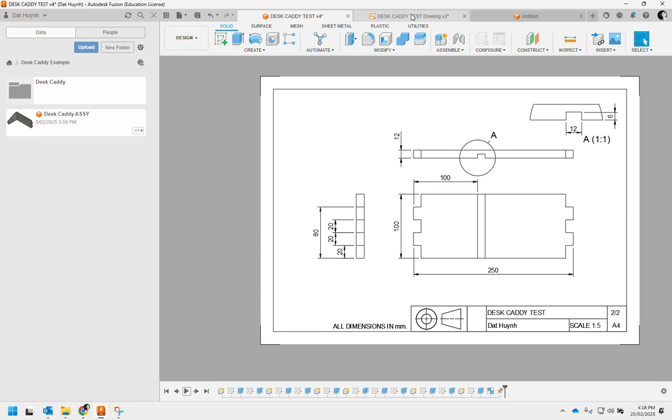Okay, so you see that's the whole process of making the basic carcass and the base of the Desk Caddy. You can add on more stuff later on if you like, but we're going to keep it simple for the sake of the class assessment task. You also learn how to make a drawing out of this. So you can see here that it creates the drawing from that assembly, and if you update the parts, the drawing also updates.

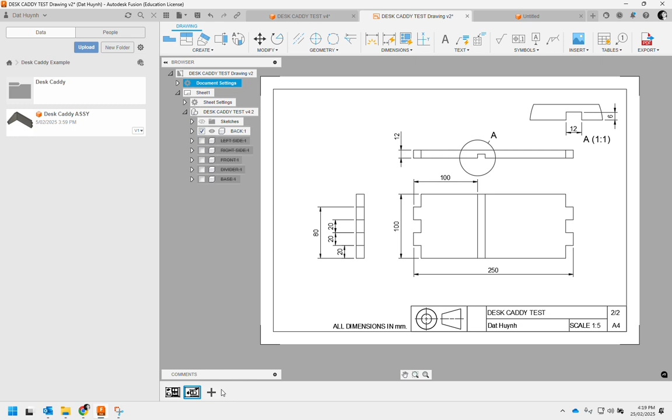And you can add on extra sheets, so you can do detail item drawings of each component, which you will take into the workshop, and that's how we're going to make your job when you have your full set designed and printed. We can then go ahead and cut your timber to make your Desk Caddy. Okay, so this is what we're going to be doing. I'm going to start modeling now.

The first thing you should do when you open up a new file is to go to Assemble, and the first thing you should ever do is just start a new component. Before you do anything else, start a new component. Okay, then what you're going to do first is name that component. In this case, I'm going to start with back piece, so I'm just going to go back part, and don't touch anything else. Leave everything as is, and just name it back part. Press OK, and we're going to start modeling up the back part.

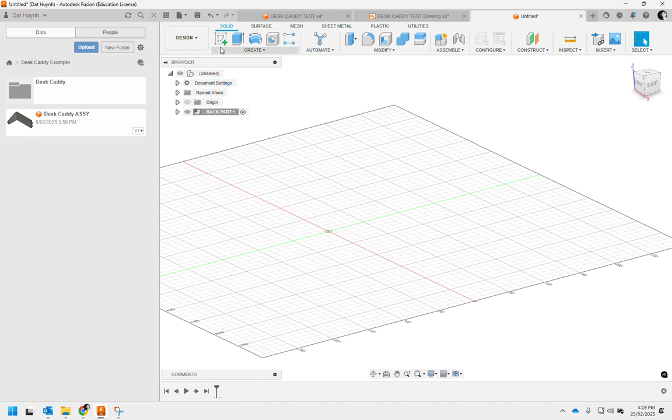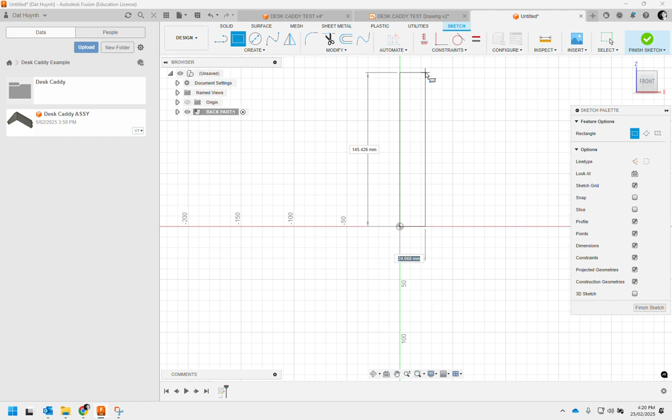And the way we start modeling is we start with a sketch, and we're going to choose the plane we are after. In this case, I'm going to choose the front plane here. And our first sketch must use the origin so that we're anchored into this 3D space, this universe that we just created. I'm going to draw a rectangle, and I'm going to model this as a cross section of the thickness and the height, or thickness and the width, and I'm going to extrude the length.

So I'm just going to click there, roughly what I need, and then I'm going to go back and I'm going to dimension it. So you can see here the shortcut is D for those of you who are working keenly. Press D, gets you to that tool, dimension, and I'm going to dimension this line here to be 12 mil. That's our thickness. Hit enter, and the height, click, and type in 100. For me, it's 100, depending on your job, right? So for this example, I'm making it 100 tall and 12 thick.

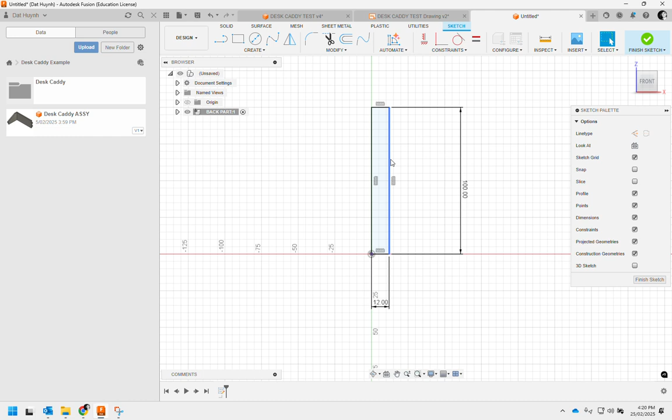Once I'm done, you notice all the lines are black. That's what we're after. Okay, make sure all lines are black before we finish the sketch, so we can't accidentally shift and move anything. So to get out of dimension mode, you can hit escape, and you can see here they're going to highlight the line, but I can't click and drag it because it's fully constrained, right?

But if I delete this 100 though, you'll see that this line's turned blue, but all the other lines are black. That means I can't wiggle this left and right because it's constrained as 12 millimeters, defined as 12 millimeters, but I can move it up and down. So that means my height is not constrained, right? It's got no dimension or constraint to hold it down. So I'm going to go back and do that dimension to be 100.

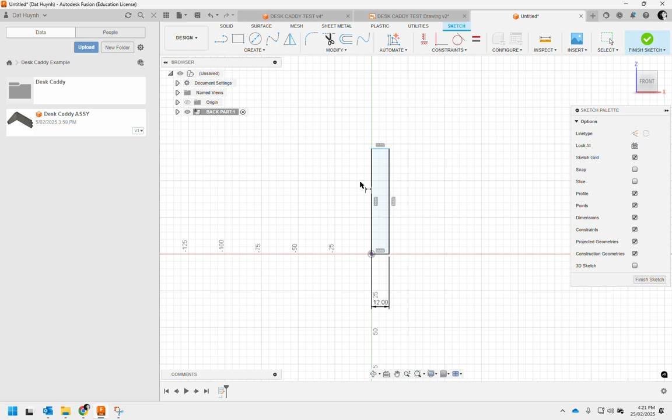And so we've defined this rectangle exactly to be 100 by 12, and it uses the origin here, so it anchors it to a 3D space. Finish sketch, and then we're going to extrude this shape. It helps to get to a 3D view, so just on my cube, I'll just click on the corner, get to a 3D view.

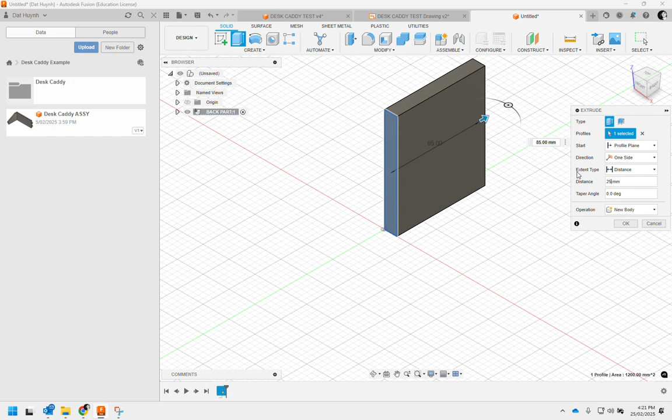And just to preview what it's going to be like, I'm going to drag that out, and it gives me a preview of the object. I'm going to make this distance to be the length. I'm using 250. You might be using a different number. And when I'm happy with that, I hit OK. Ignore everything else for now. It's all set correctly. Hit OK, and you've made yourself a rectangular prism that represents our block of wood.

Now, the way we model should reflect the way we process the timber in the workshop. So you get your piece of timber, you cut it down to size, and then we're going to mark out the joinery. So I want you to adopt the same type of methodology in your CAD modeling. It helps you understand your parts better, and also helps you work out what dimensions are important to you and when they become available. So you can only really mark out the joints after you've got your block of wood.

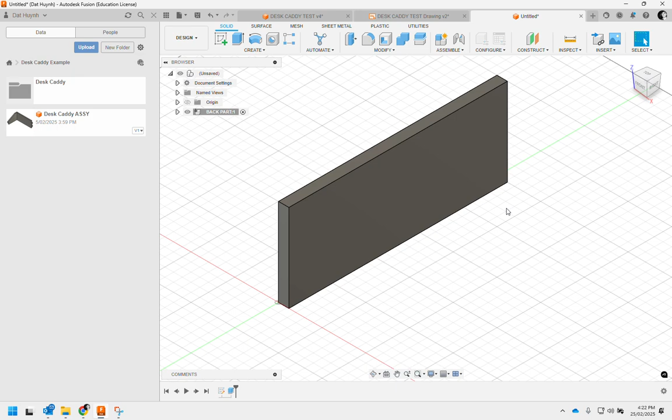So now we've got a block of wood. I'm going to create a sketch on this surface. So I can right click, create sketch, right? Or I can go to here and hit sketch, same thing. So if I go here and I go create sketch, I can then start marking out my joinery. So as you saw, I've got a box pin at the back. I'm creating a box pin that is, let's use this bottom corner here.

I'm going to draw a few rectangles, right? I'm going to draw rectangles, but I'm going to draw it badly. Let's draw 3 rectangles like that. Okay, right click, OK. So I don't want to be in the drawing tool anymore. And you see here that I can wiggle this line, I can wiggle this line. I can't wiggle this line because it's created an automatic constraint that this line, it knows I want it to be collinear with this edge of this rectangle. So it's made it collinear.

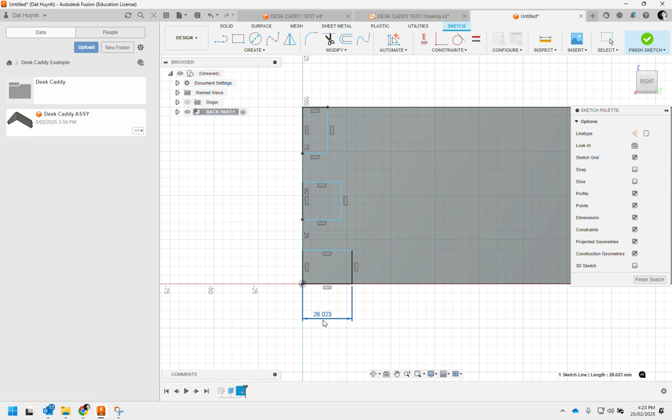But let's firstly define one rectangle. Okay, so we do that with a dimension. So I hit D for dimension. I want this one to be 12 mil because that's the thickness of the side piece that's going to join in. And the height of it, I can do it point to point or a line. In this case, I'll do point to point just for a difference. And I'm going to make this 20.

Okay. Now, I'm going to right click and I'm going to press escape to get out of dimension mode just to show you a neat way of dimensioning and using constraints so that you don't have to keep making each one of these 12 mil long. Okay. So there's a few ways you can do it. You can do it via constraints. There are all these different constraints you can use. They create relationships between lines and features so that you don't have to keep on using dimensioning.

Okay, so for example, I could want this line to be collinear with this line, right? So if I use collinear in this case, collinear is this one here. So from now until forever, if I click on 1, click on 2, they are now collinear. That's the relationship, unless I choose to delete that relationship, okay? Alternatively, another way you could do it is you can make this blue line equal length to this blue line. So let's try that. If I make equal and I go, I want this line to be equal to this line, guess what? It also works because logically, if this is in line, then that distance is the same.

So I've made two different constraints here. Ideally, I wouldn't do two different constraints. I would either make these blue lines here all equal or make these three lines collinear. Both are the same. You end up with the same result. And you can see here that if I try to wiggle this left and right, I can't because it's collinear. But I can move this up and down.

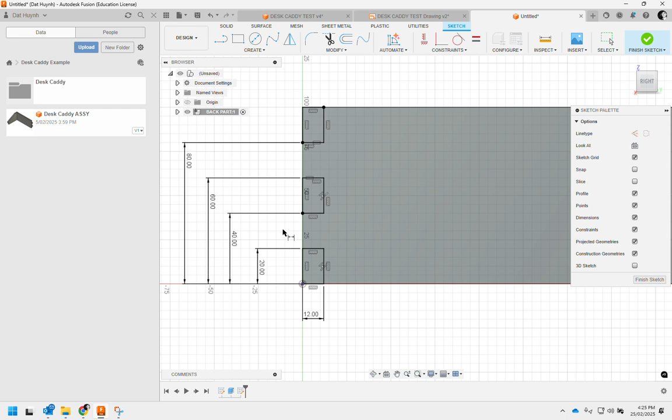Okay, so all my rectangles are now constrained. And I'm using this type of dimensioning because I'm going to use a marking gauge against this edge. And that way I can set the marking gauge to these numbers without having to do quick maths by adding up numbers here. Okay, either way is, I guess, correct, but this one is going to be more practical for you in the workshop. Once I'm happy with all these rectangles, nothing can be moved. I hit finish sketch.

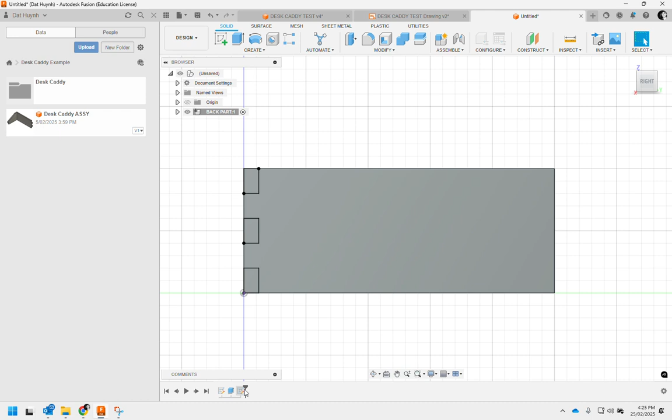Actually, I'm going to save you a bit more time. I'm going to go back to that sketch. So if you find that you hit finish sketch and you want to go back and edit it, at any point in time, you can just right click on that step here and edit the sketch. So don't go making a new sketch. You already created the sketch. If you forgot to add something in, just go back and edit and add it in.

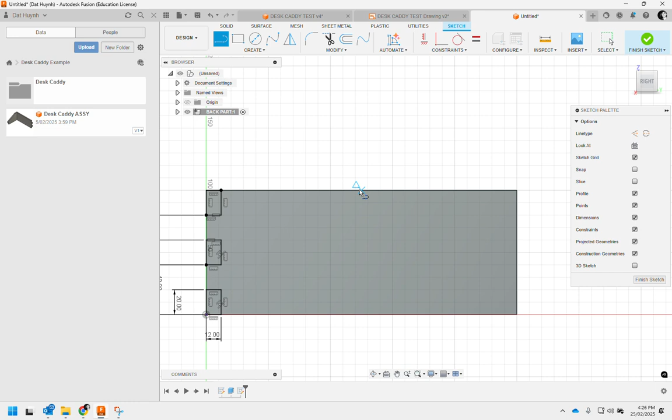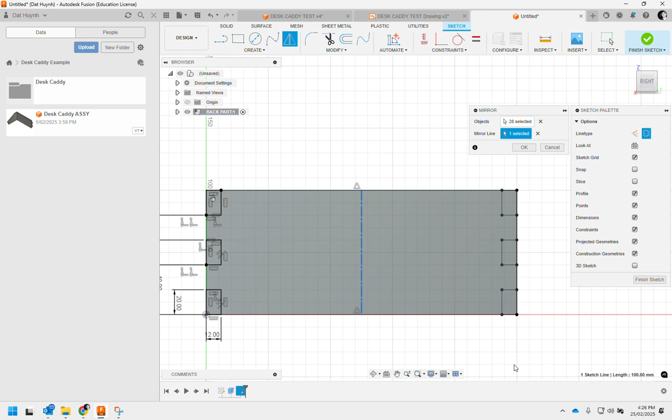What I'm going to do is I'm going to create a mirror plane. Okay, so the way I'll do that is I want to use a line tool. I'm going to mark the center point of this rectangle. The center point turns up when the triangle appears. I'm going to draw a line in, right click OK, I'm going to make this line a center line, like that. And then I'm going to select these three rectangles, and then I'm going to mirror that sketch. And the mirror plane I'm going to use is this right here, allowing me to mirror it to this side, okay? If I do that, that means that constraint has also been applied.

And if I edit any of these numbers, like for example, if I edit this number to be 20, this updates, this also updates, right? So it saves you time not having to redimension and reconstrain this side. So this is how we use the tool smartly. Bring that back to 12, and then I hit finish sketch.

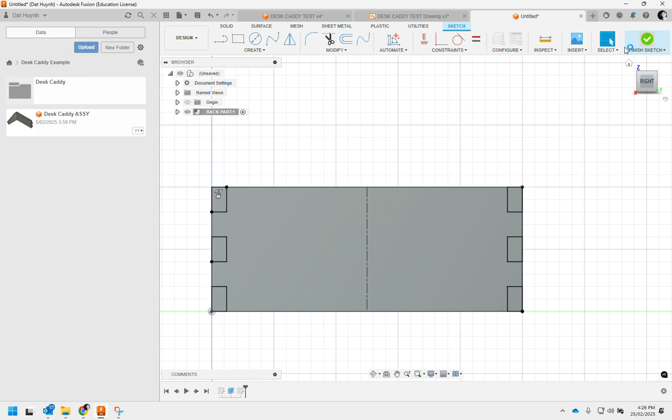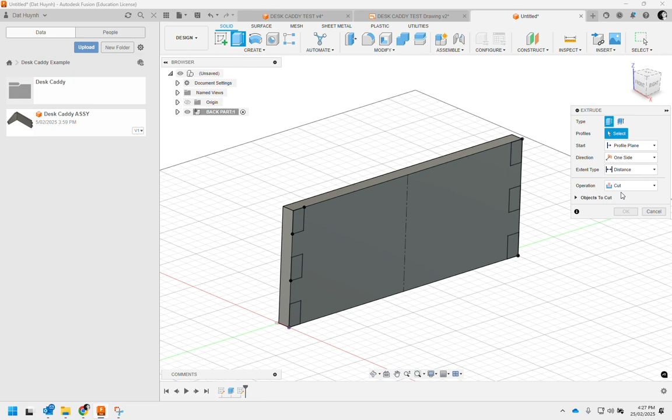So now I can extrude cut these joints out, right? So I'm going to do a 3D view. Holding down Shift and the middle mouse button allows you to rotate like this. Please use a mouse. It helps you out a lot when you're using CAD. So I'm going to extrude, but in this case, instead of operation of new body, I'm going to make it cut. So we want to remove material. So here it allows us to select the things we want to cut. And you see the direction arrow is pointing that way. All you can do is reverse the direction like that to make sure it's in the right direction.

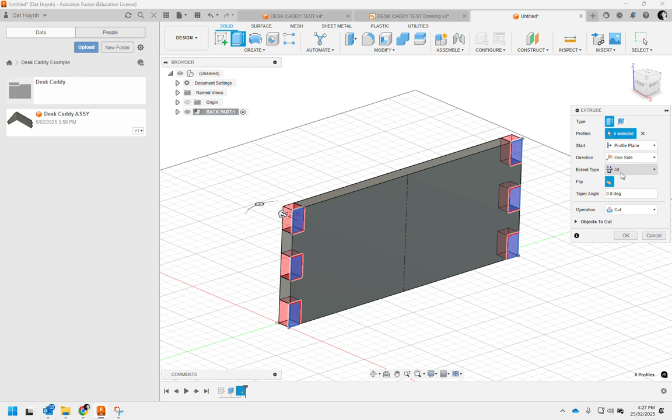I selected 6 of the rectangles, but instead of distance of 40, which is an arbitrary number, we actually go to all. So what that means is the instruction for the CAD program is that we're going to cut away these 6 rectangles all the way through the solid. So no matter how thick our timber is, like pretend we got to upgrade our timber to a thicker material, let's say it was 20 mil thick. If we use all, then when we extrude cut our joints out, it will cut all the way through 20 and not just 12. Okay, so all is very powerful for extent type, so it allows you to cut through the entire geometry, the entire physical product we're doing.

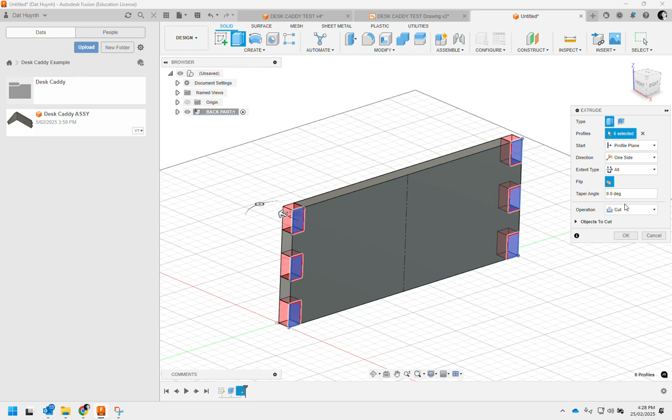Hit OK when you're happy, and it's made the back piece. So we're happy with that. I could do a through housing too, but I might do that later to show you that we can go back and edit that part later. Okay, so now we've made one part. I'm going to make the next component. So the first thing we do when we make a new component is we go to assemble, new component. Okay, we're going to rename it right away to be, in this case, left part.

I'm not going to call it side part because there'll be two side parts and they might be different. They might be mirror imaged. Left part. Okay, and ignore everything else. Actually, I am going to generate it off this surface. Hold on, I'm going to cancel that because there's a reason why I need to select the surface.

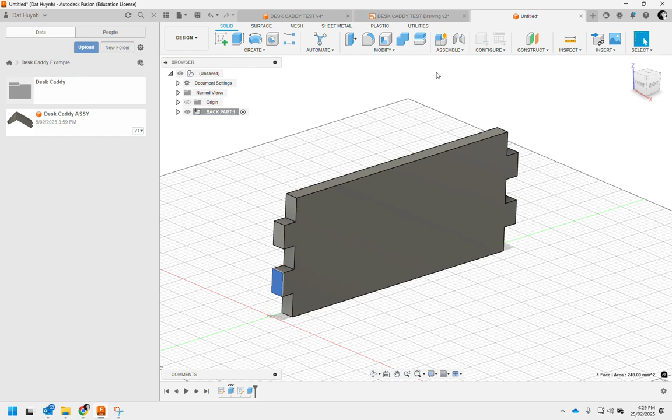I'm going to select that face there because I want my new component to be generated off that face. The geometry is going to be useful for me later. So assemble new component, and it says the parent one selected, so that's the parent face it's going to adopt. Here I'm going to put in the left part. Hit OK. All right, so it gives me a chance to select here. So I'm going to select this face right here, because I want my left part to be generated off this geometry.

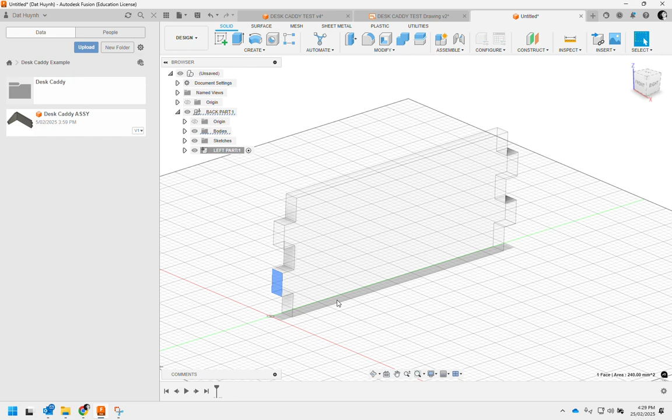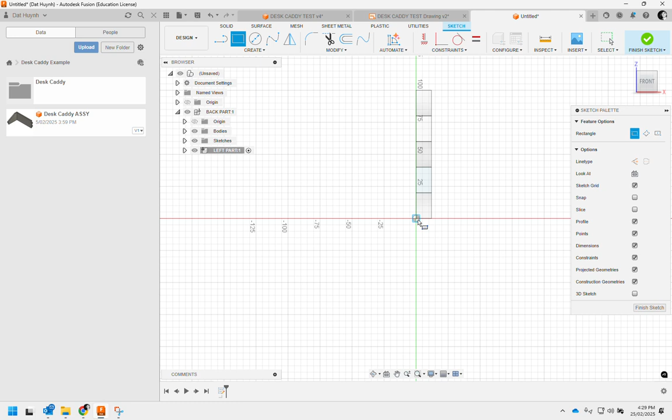Okay. I'm going to create a sketch on this surface now. The back part's ghosted out because it means the left part's active and the back part's not active. You can make it active by hitting the dot like that, okay? But we're actually working on the left part now. So on this surface here, I'm going to create a new sketch. Now I'm going to draw a rectangle using the origin. I'm going to make it just slightly bigger than what we need.

Press OK. And I could definitely make this side part and dimension it, hit D for dimension. I could dimension this to be 100, which is fine. You can totally do it like that. But what it means is if you modified your back piece, edited it to be taller than 100, say 150, then this side piece will stay at 100 because you defined it as 100. But instead, you can generate the side piece off geometry of the back piece. So I'm just going to delete this 100, and I'll show you.

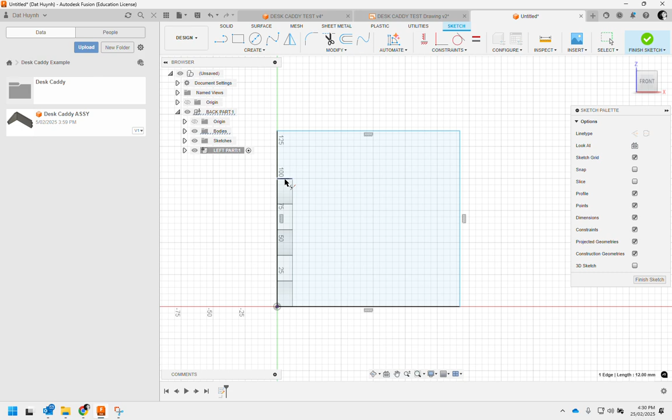So now that that's no longer constrained, I can use constraints not just within the part, but across the components. So I'm going to make this collinear. I want this edge to be collinear with this edge. And when you see that happen, these purple lines and purple circles appear. That's telling you that's referencing geometry from another component. So the left part's referencing geometry to the back part. So if the back part changes size, the left part will also update to be always collinear.

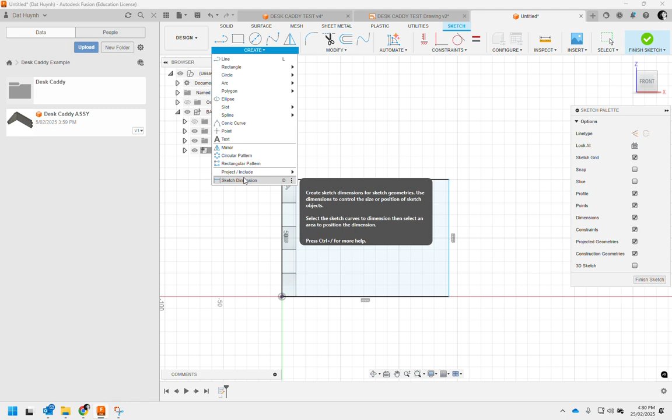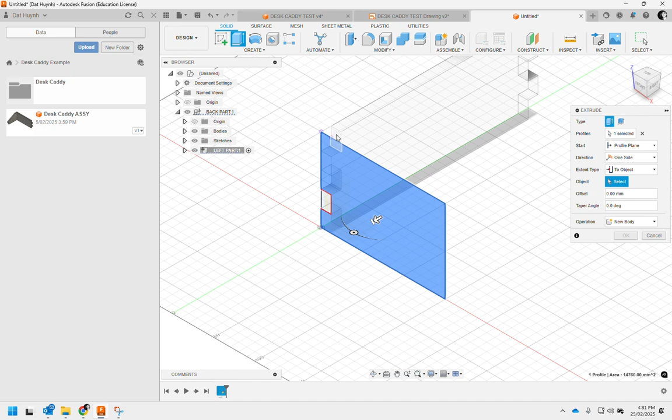What we do need to do is dimension the length of this piece, and we're going to make that 150. Okay, so the rectangle is fully constrained. Finish sketch. I'll give you a 3D view to see what's going on. And now I'm going to extrude this piece. I will highlight it, change direction to be this way. And I can choose to project to that object, which is 12, and so no matter what, it will close that gap. You can do it that way, or you can type in a distance of 12. Either way, you'll get the same result.

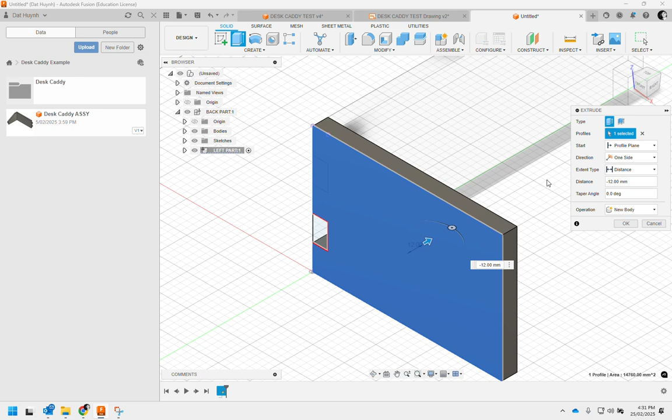So if you want to make it a smart component, if you created the joint correctly, you can extrude it to the component. But in this case, I actually do want to extrude it 12 because I want to make sure that all my parts are 12 mil. It's not much difference. If you make this 12 and the joint dimensions change, you have a gap. That's the only difference. But for the sake of this example, I'm going to make this 12. Hit OK, and that's made the new part.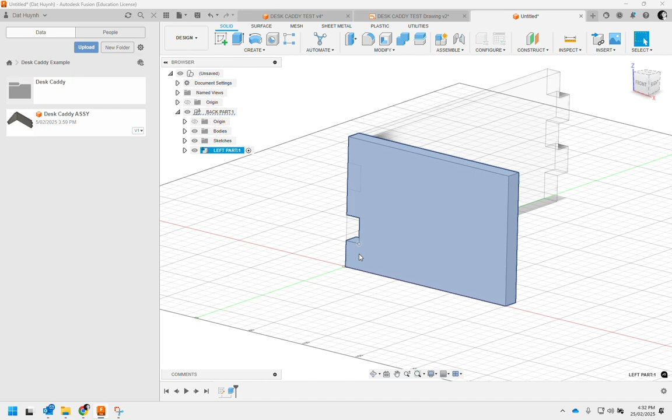Okay, so here's where I purposely left a feature out. If you go back to the assembly, you see that it's got an interference here. This piece is actually interfering with this piece. This piece doesn't actually have a gap there. So what I'm going to do is go back to my left part and edit the sketch so I can get rid of this material here. So what I can do is activate that sketch. Right-click this sketch here. I'm going to edit this sketch.

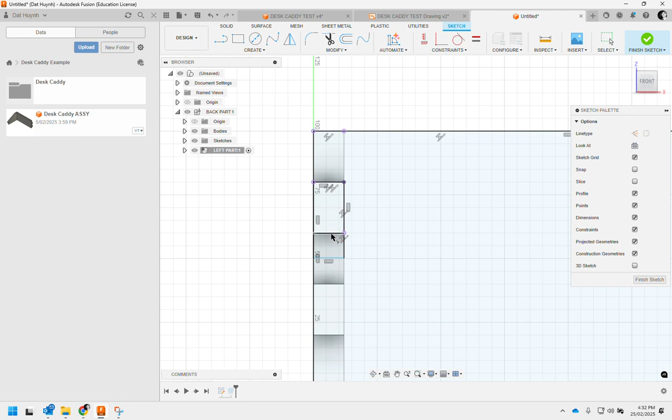What I want to do is create geometry here. I'm going to draw a rectangle off that line. And then I'm going to use collinear once again and make this edge collinear, this edge collinear, this edge, and this edge collinear. Okay, so it's all referencing it now. Right click, OK, finish the sketch.

So what we've done is we've gone back and edited that sketch. I didn't create a new sketch to do that. I went back in time and edited what I'd already done. All your features down here, sketches and features, can always be edited. That's the first thing you should do when you're trying to problem solve, instead of making a new sketch and making a new feature.

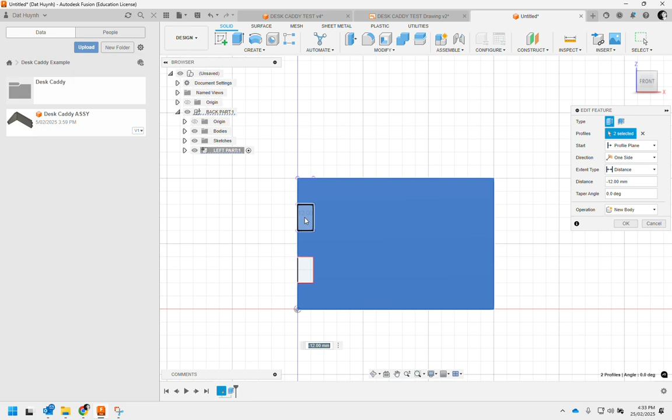So here's the feature that extruded that part. I can right click and edit this feature. What I can do is click that and it takes that part away. Okay, so you see here that's taken that part away. And then I hit OK. So it's updated it.

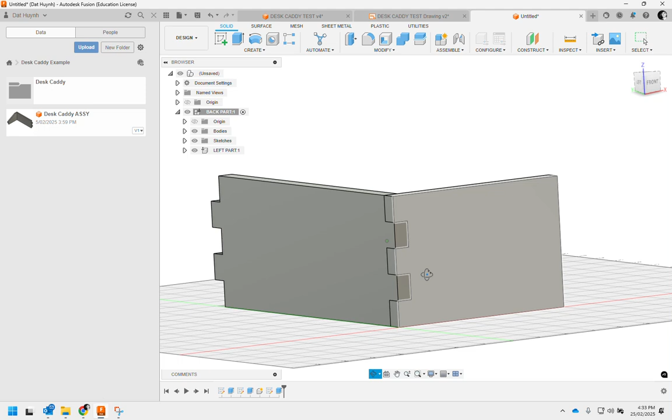And now what we've done is we've generated a joint. The side piece is generated off geometry of the back piece. So the way I can prove that to you is if I go to my back piece, double click there, I say I want to edit that part, I can find the geometry to make it. I'll find the geometry that made the joint. So the geometry that made the joint is here. That's the sketch there. I can go edit sketch, and let's say I change this geometry here.

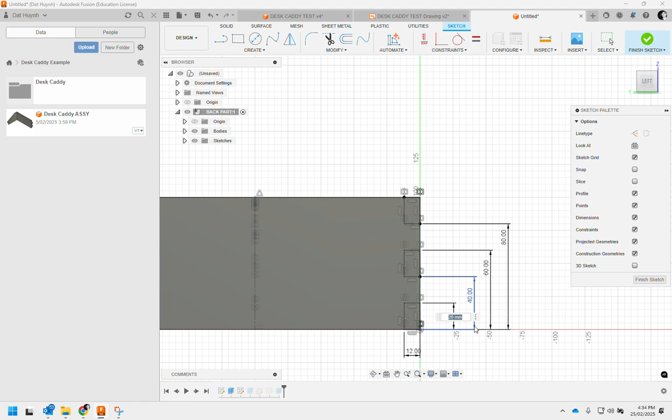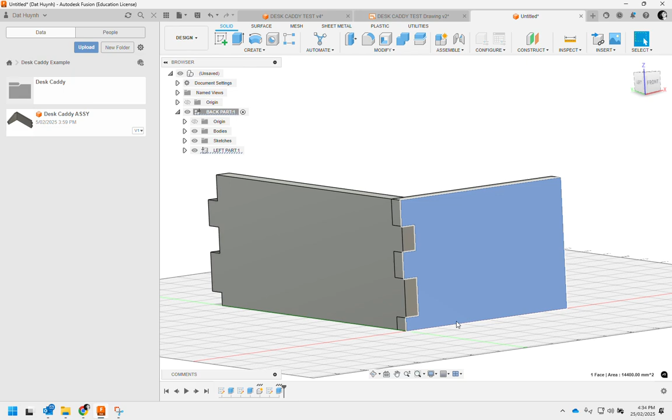This box here, I'm gonna make it 10. So it's now shorter. If I finish the sketch, look what happens. The back piece geometry on both sides has shrunken here. So this pin got wider and this gap got smaller. And on the side piece, the corresponding joint lines up still. So it allows you to make changes to a design and not have to worry about updating the part to reflect those changes. Your constraints, if you've planned them well enough, will make your life easier by updating accordingly to your joint dimensions and constraints.

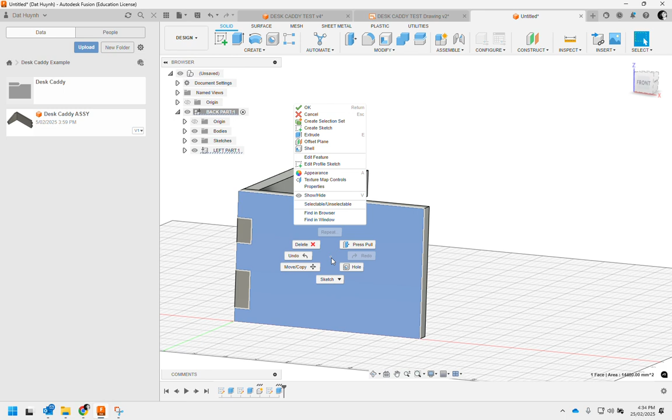Okay, what else can you do? Well, if you want to extrude further on this as a separate step, I would typically create joints separately. Each time you make a joint, it's a separate process of marking out, cutting out. But let's say I wanted to cut this on an angle. It's quite simply make a sketch on that surface. Make sure you're in the left part though, because we are editing the left part. Create a sketch on this surface, draw a line.

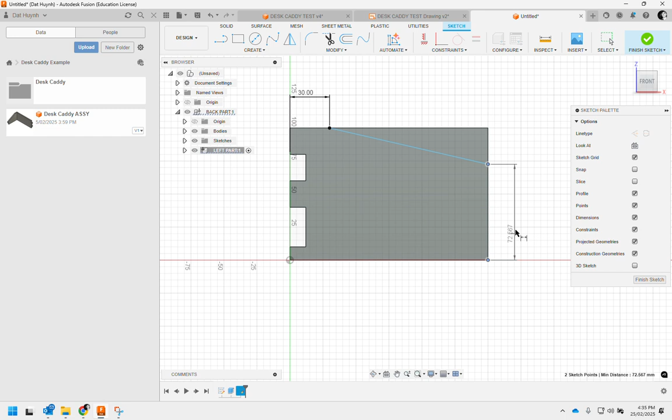I like to draw the line first and then dimension it. I find it's easier to do that. I can then constrain this point to this line to be a set distance. Let's call that 30, for example, and I'll constrain this point to this distance. Let's call that 50. Okay, so that line's now black. Finish sketch, extrude, select that surface. We'll do cut. I'm just going to rotate around, and I will choose the direction this way, but the extent type is through all, so it'll go through all the material. You hit OK, and there you go.

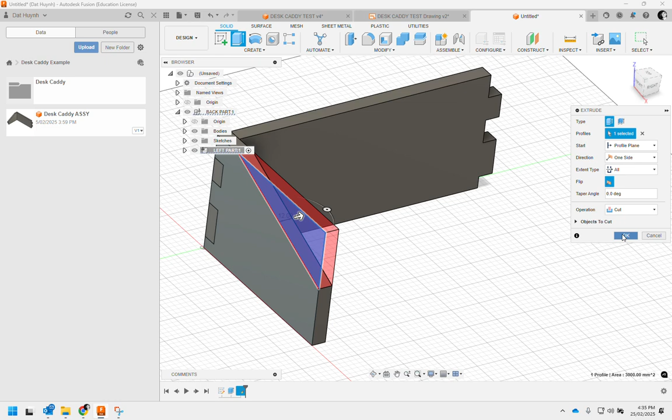It's done it. It's made that angle. So what you got to do is keep that in mind when you're modeling. If you use that technique, it allows you to modify one part and updates the other parts. If you want to go back and change it again, like for example, you find that the joint needs work, find the sketch that you're after. In this case, it was this one. You can always double click, also works to edit. Double click the part you want to edit. Put in 20 again. Hit finish sketch, and it updates, auto updates.

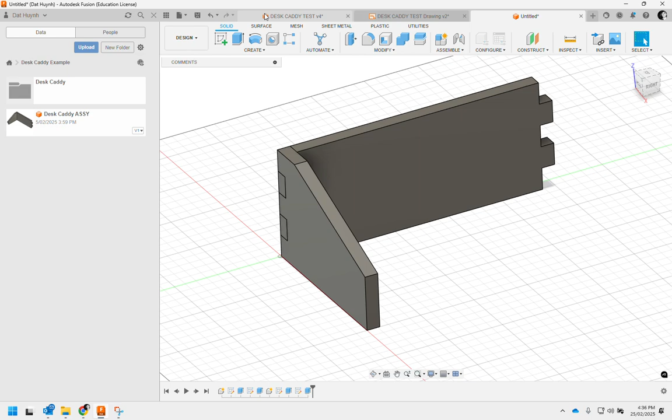Okay, so I'm going to stop the tutorial here because it's almost 20 minutes, my 20-minute limit of attention span. And you see that if you work well, you end up with something like this, with this many steps, and you can see that it's generated off existing geometry. So that's the advanced way of modeling. You can still model each part separately if you like, but this technique allows you to untap the potential of Fusion.